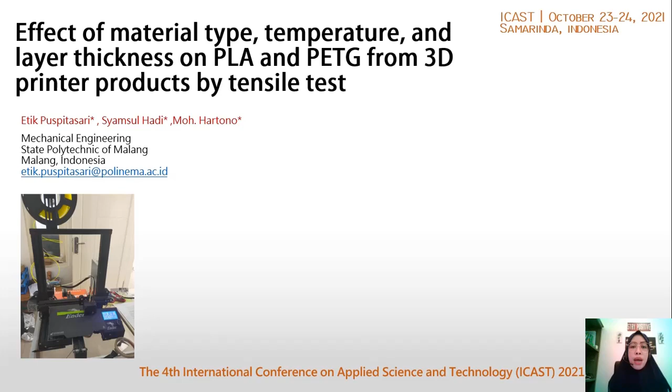Introduction. 3D printers are one of the current and future technologies that must be studied, where the science of reverse engineering is developing. 3D printers are very practical in product development to print three-dimensional objects such as parts for prototypes, machine parts, robotic parts, electronic circuit parts, and other plastic products.

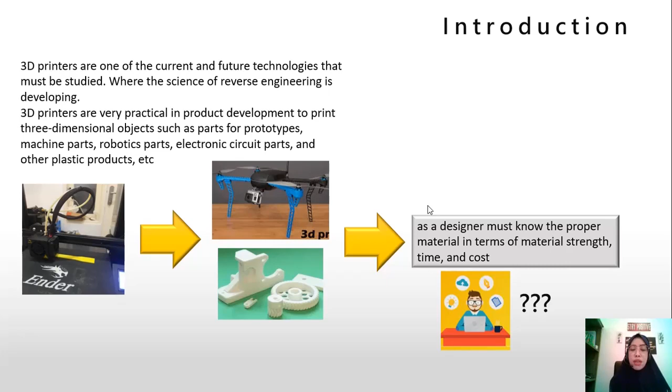You can see in the image below the 3D printer process, and then this is an example of a 3D printer product. As a designer, you must know the proper material in terms of material strength, time, and cost. Some of the literature review about prototype products with 3D printers and previous research on 3D plastic material can be seen below.

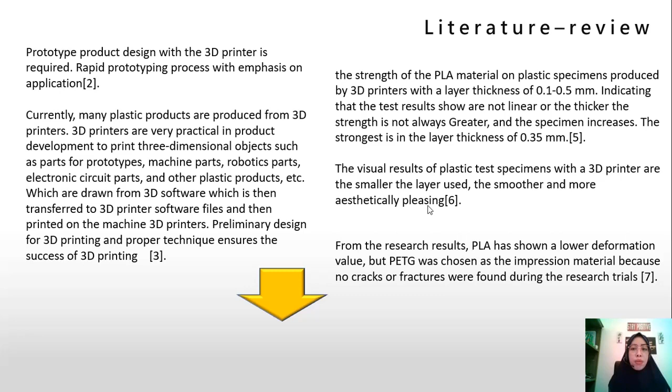My research purposes are to analyze the effect of material type, temperature, and layer thickness on the tensile strength of 3D printed products with PLA and PETG materials, analyzing the effect of interaction between material type, temperature, and layer thickness on the tensile strength of 3D printed products with PLA and PETG material, and to be able to make a 3D design and prototype of a 3D printed product from the research results that have been obtained.

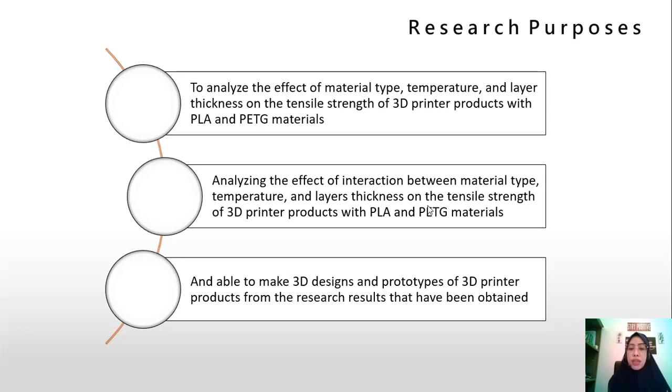Methodology. Research methodology can be seen in the research block diagram. The independent variables are material type, temperature, and layer thickness. The control variables are printing speed, infill pattern, infill density, and bed temperature. Then we process on the 3D printer. The output variable is tensile strength. Then we can make product design and product manufacturing with a 3D printer.

My research hypothesis is there is an effect between material type, temperature, and layer thickness on the tensile strength of 3D printed products made of PLA and PETG material.

Then the data processing and analysis method: drawing the tensile test specimen in drawing software and saving in STL format. Then the data is entered into Cura for processing according to the above variables and converted into a G-code file, then printed using a 3D printer, then tensile tested, then processed by factorial design, and then we make product designs and manufacture the product with a 3D printer.

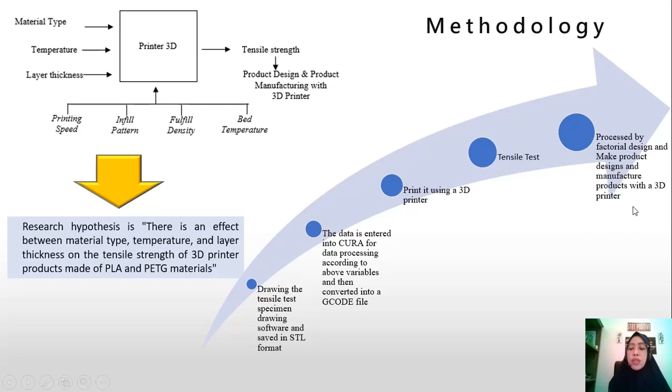Result and discussion. First, we draw the specimen design for the tensile test standard ASTM D638, then set the specimen parameters with Cura, and then convert it into a G-code file. The G-code file we can transfer for the 3D printer process. And this is the result of the tensile test specimens from PLA and PETG from the 3D printer. This is all of the tensile test specimens.

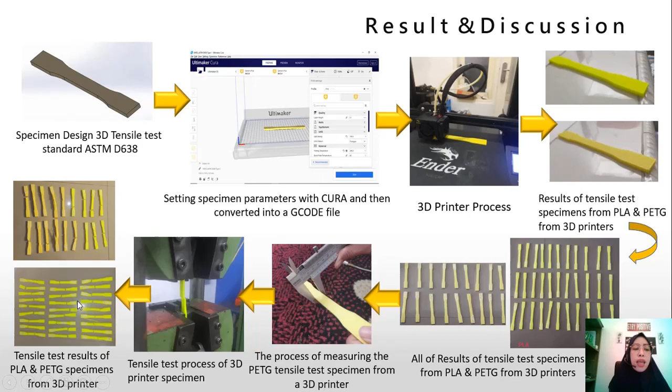The next process is measuring the PETG tensile test specimen from the 3D printer with a vernier caliper. Then the tensile test process, and this is the tensile test result of the PLA and PETG specimens from the 3D printer.

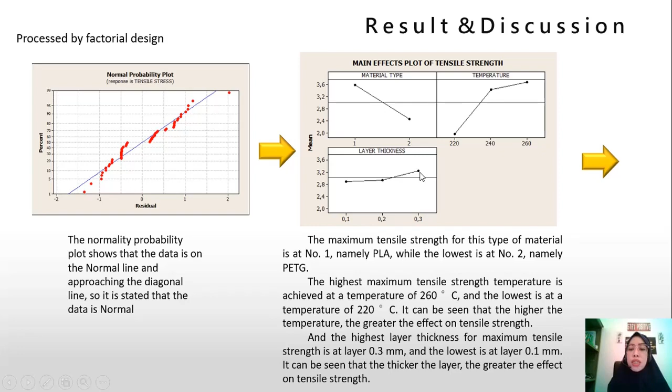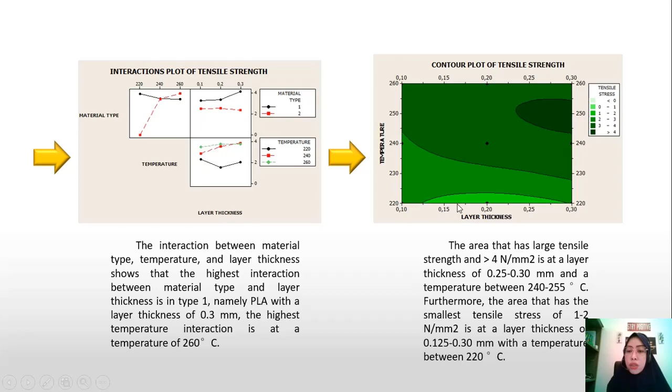From the research above, the best tensile strength is for PLA material with layer thickness of 0.3 millimeter and temperature of 260 degrees Celsius. From this result, the researchers make an additional hanger for a motorcycle design and then make a prototype printed on a 3D printer as shown in the image below. This is a 3D design of the additional hanger for a motorcycle. After that, we printed the 3D result of the additional hanger for the motorcycle.

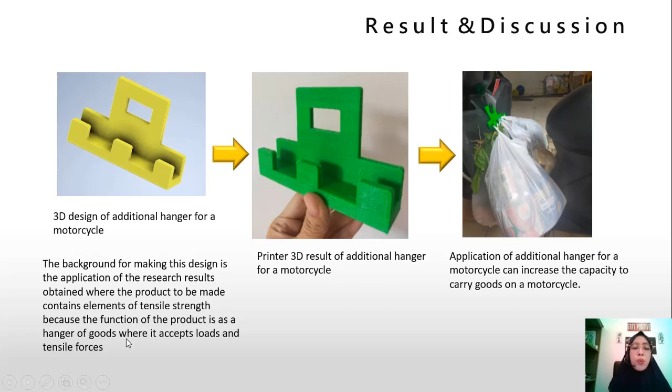And this is the application: the additional hanger for a motorcycle can increase the capacity to carry goods on a motorcycle. The background for making this design is the application of the research result obtained, where the product to be made contains an element of tensile strength because the function of the product is a hanger of goods where it accepts loads and tensile force.

Conclusion. There's an effect of material type, temperature, and thickness on the tensile strength of 3D printer products with PLA and PETG material. Each hypothesis is accepted, supported by the factorial design method where the p-value of the 3 variables is less than 0.05. The maximum stress is on the PLA material type while the lowest is on PETG. The highest maximum tensile stress is achieved at a temperature of 260 degrees Celsius and the lowest at 220 degrees Celsius. It can be seen that the higher the temperature, the greater the effect on tensile strength.

And the highest layer thickness for maximum tensile strength is at layer 0.3 millimeter and the lowest layer is 0.1 millimeter, and has a maximal tensile strength of 3.651 Newton per square millimeter. It can be seen that the thicker the layer, the greater the effect on tensile strength.

Conclusion number 2. There is an interaction effect between material type, temperature, and layer thickness on the tensile strength of 3D printed products with PLA and PETG material, supported by the factorial design above, where for the interaction of the three variables the p-value is less than 0.05. And conclusion number 3, 3D design and product prototypes for an additional hanger for a motorcycle by 3D printer have been made according to the result of the research.

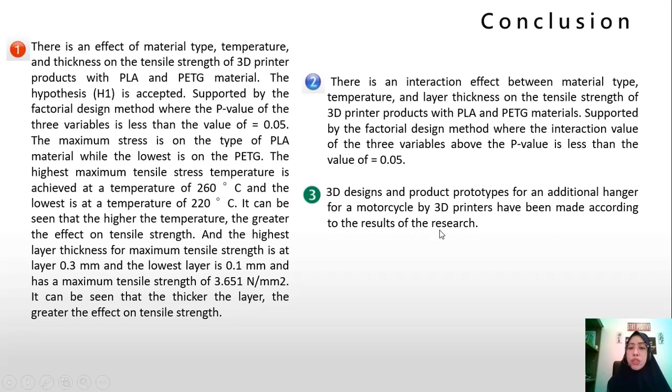Recommendation 1. For the PETG temperature variable in the next research, start with a temperature more than 240 degrees Celsius. In the motorcycle hanger product, it can be seen if you use a 0.3 millimeter layer, the surface results are not smooth. If you want it to be smooth from an aesthetic point of view, it's good to use a thickness of less than 0.3 millimeter, for example 0.2 millimeter or 0.1 millimeter, because the smaller the layer thickness, the smoother the surface of the product will be. Recommendation number 3, this 3D printer is suitable for making prototypes, not mass production.